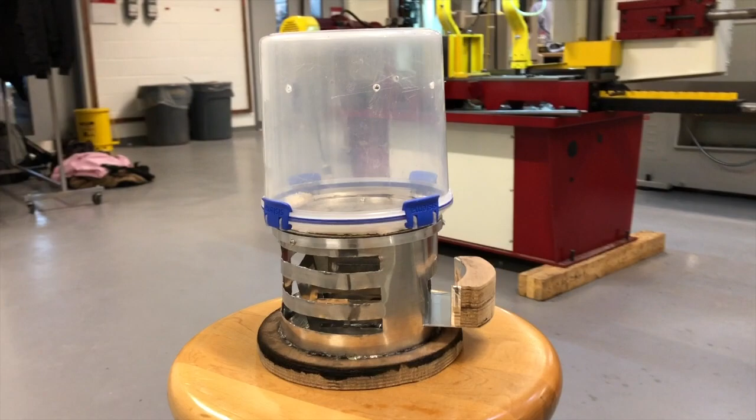Next we'll be talking about the objectives for our design. First, we want it to be compact. That means it's small and easy to carry. What we are personally going for is 1 foot in volume overall.

Secondly, we want it to be durable. That means it's tough and it's also impact resistant. Thirdly, we want a portable energy source, and what we're using are fuel tablets. Fourthly, we want quality, and that means making sure that our popcorn is edible and not burnt.

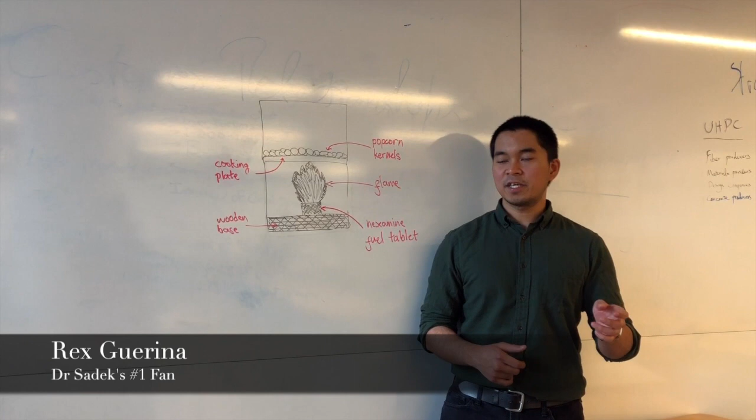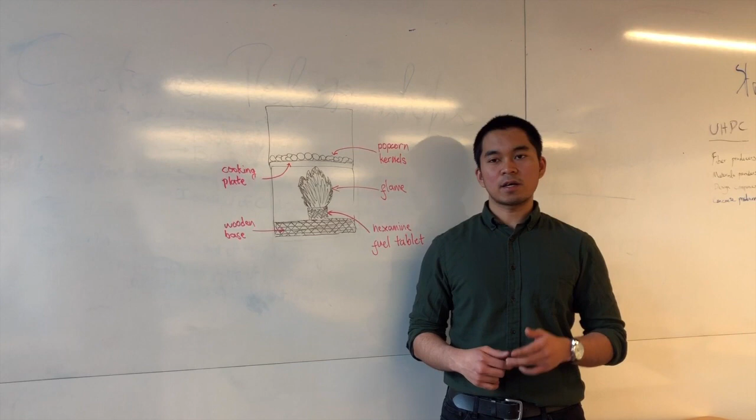Unlike most of our colleagues, we decided to power our popcorn machine without using electricity, but instead we chose fuel tablets as our power source because one of our objectives was to make our machine portable for outdoor enthusiasts such as campers. The design of our machine is straightforward.

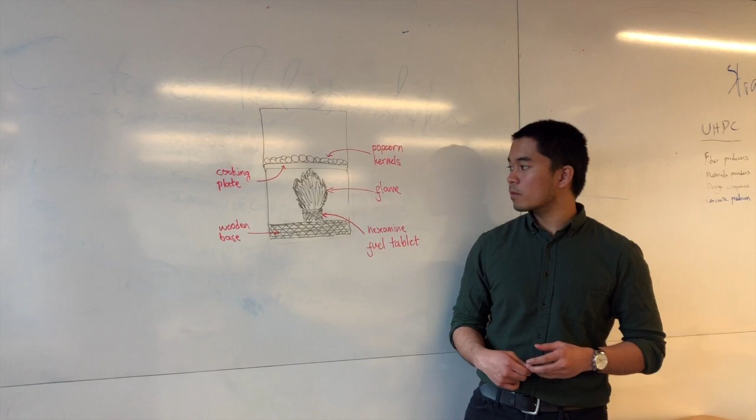We chose heat conduction as our primary source of heat transfer because it is the easiest one to do. Here in this diagram, the flame from fuel tablets warms the cooking plate, which then transfers the heat it received into popcorn kernels until they pop.

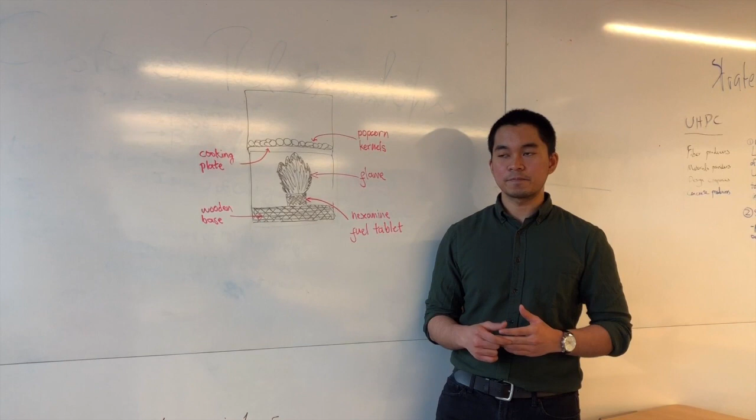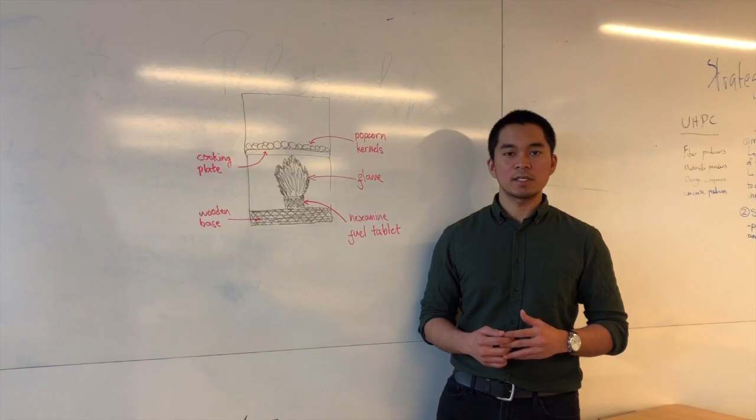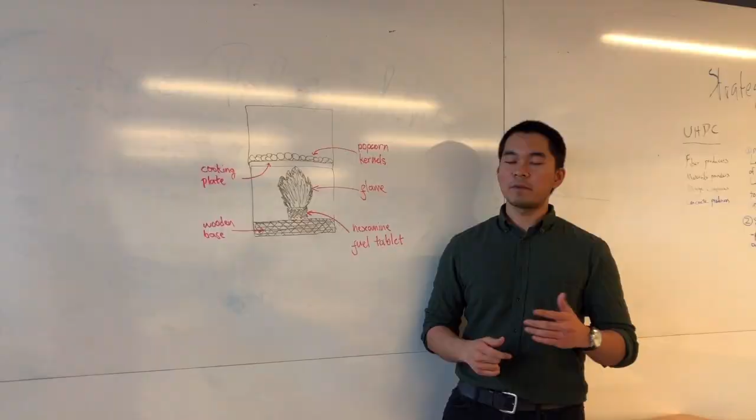The popping temperature of popcorn kernels is about 180 degrees Celsius, and based on our calculations, reaching that temperature is easy to do. In addition, we also thought of reducing the cooking time of the popcorn. To do that, we need to increase the pressure of the cooking chamber by putting an enclosure around it. Based on our estimations, we can pop the popcorn kernels in about 2 or 3 minutes.

At the first stage of our prototyping, we initially thought our design was perfect, but later we found out that even perfection has some room for improvement. So we made 4 major improvements for our design.

We added a wooden base to make the design more stable. We removed the stirring rod because it was unnecessary. We added a clamping mechanism to secure the device better. And we also added air holes on the heating chamber to make oxygen flow inside the machine and allow combustion to occur. By the way, it was less than 2 minutes too.

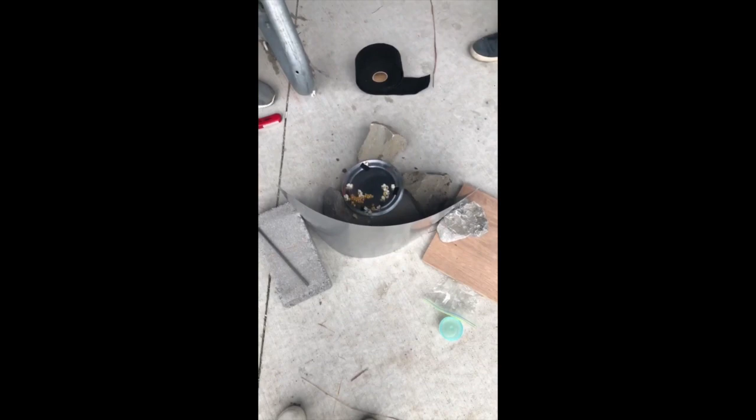Yeah, all we need to do is close it.

Want to know how I designed the Pop2Go Ultimate? Well, let's take a closer look.

In order to utilize the flame heating method effectively, along with satisfying the secondary objectives of being durable, compact, and portable, we decided to implement a tower-like stacking design with the fuel cell in the heating compartment, the joint ring connecting the sections, and the popcorn container to hold the popcorn.

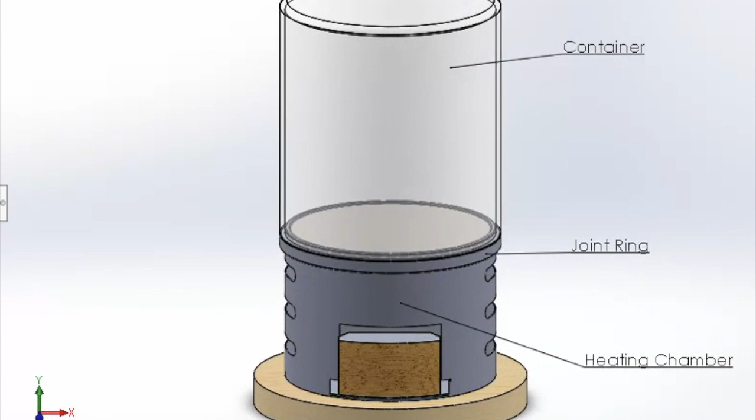We wanted our design to be simple and without any fancy contraptions. As mentioned by Charles Perrow in The Nature of Normal Accidents, the more complex the design, the easier it is to fail.

After doing the CAD modeling, we analyzed the design by conducting a transient thermal simulation. To reduce the processing time for simulation, we simplified the design by removing all the unnecessary components and just leaving the important ones. To run the simulation, we used 3 boundary conditions.

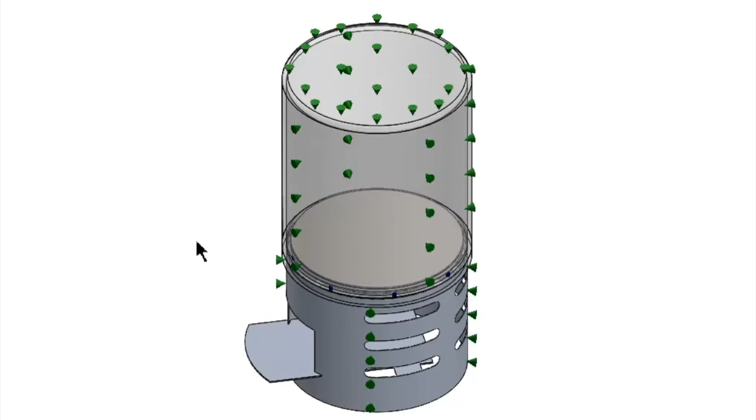Heat transfer coefficient is assumed to be 10 watts per square meter Kelvin. Initial and ambient temperatures are both assumed to be 298 Kelvin. And based on our calculations, the power source is estimated to be 450 watts. We also set the simulation time up to 5 minutes, which was the estimated burning time for fuel tablets. And for meshing, due to interface errors, we decided to use fine meshing to avoid meshing problems.

After running the simulation, we find that the maximum temperature occurs at the center of the cooking plate. We also noticed high temperature at the base of our container, so we might have to change the insulation on it to prevent it from partially melting in the future.

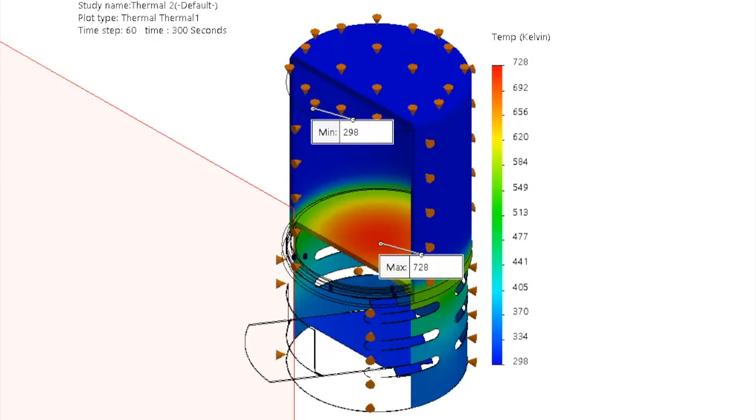An important factor to consider is the marketability of our product. We want to ensure that we are able to commercialize it and sell it to the people. So the three things that we are considering are the manufacturer, the region, and the people.

So who we would choose as our manufacturer would most likely be a company in China, because the labor cost over there is low, and we would like to create a lot of products so we could scale it up and reduce the price of each individual item.

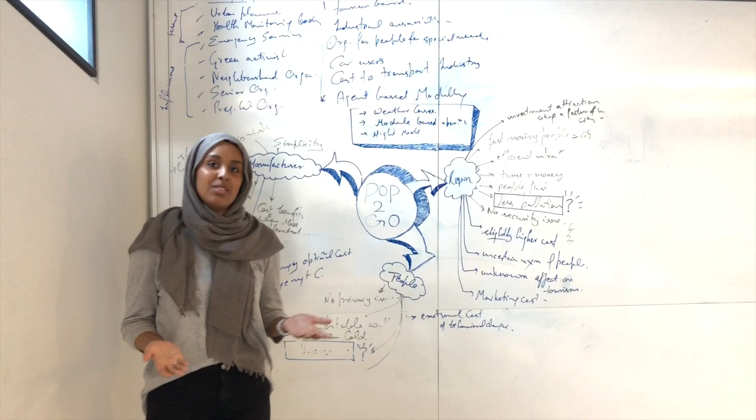Secondly, the region we would most likely sell it in is North America, because we're in North America. And the stores we would most likely sell it in are Walmart and Canadian Tire. Thirdly, the people we would like to get involved is us, because we're the ones designing it.

In the beginning of the project, we were given a $200 budget along with a specific list of online stores to purchase our materials. Now with our materials in hand, along with our design and our CAD models, we were able to move on towards manufacturing.

The components of our Pop2Go Ultimate are mostly manufactured out of aluminum sheets that are cut by hand and machine. We also use a CNC to manufacture profiles that are much more difficult to do by hand, such as the jointery. Along with this, laser cutting is also used for manufacturing of the insulation sheets, along with engraving of the wooden base profiles.

Overall, this project has helped us gain hands-on engineering experience by applying what we have learned in our past courses such as heat transfer, thermodynamics, and material science. We have had some ups and downs throughout the project, but we were able to work well as a group and communicate the final goals successfully.

We believe that our project is perfect, but even perfection has some room for improvement. We could also add or change the material that was used. For example, using better plastic material and better metals, and also ensuring that our insulation is good enough to prevent the melting of plastic.